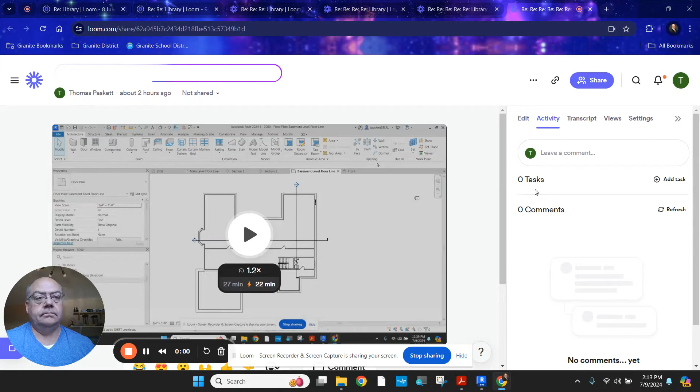Okay, so what we're going to do is there's definitely way too much space here. So in order to make it all work, and not knowing what the sizes are, we're going to do a little mix up here. So what I'm going to do is break the connections here.

So these walls are bound or connected with the walls below. So we're going to try and...

Do a little copy with them. So what I'm going to do is copy them over. I'm going to copy wall 1, Control key, 2, 3, 4, 5 walls. I'm going to take it from this outer endpoint to that endpoint. The reason I did a copy instead of a move is if I do a move, the walls underneath on the main floor are going to move as well.

So now I'm going to go through and delete these walls out, and reveal kind of the new layout, which is now a little more appropriate for a closet here. Might still be a little deep, but it's something we can work with and get that size constraint figured out a little bit better.

Okay, so we have that. The flush up here actually works pretty good, and we'll show you how to do the roof over these in just a little bit. But that now almost gets us lined up exactly where we want to be with a little bit of a change. So we're going to take and just move this one over.

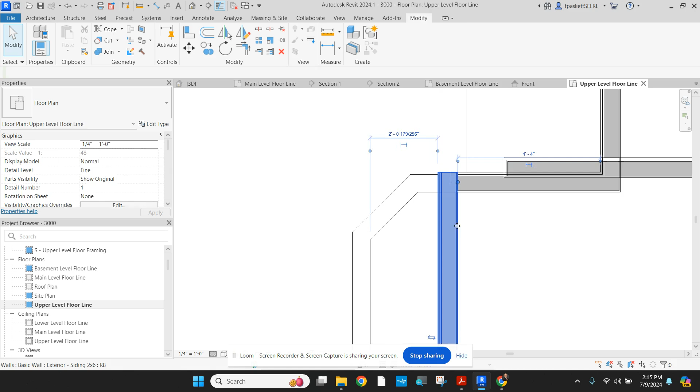Whoops, see, we're moving the one below now. Oh, it's kind of bad. Let me undo a couple of things here. We're going to undo because I don't want to move the wall, I just want to keep it aligned. So I might have to do a couple of things here. Let's take those back out again.

Let's work with our corner tool, and we'll corner these walls up. Hopefully that'll further break that connection. And right now I'm lined up on the top of the brick, so I'm really not in the correct spot for that wall there. So I'm going to try and do just a move.

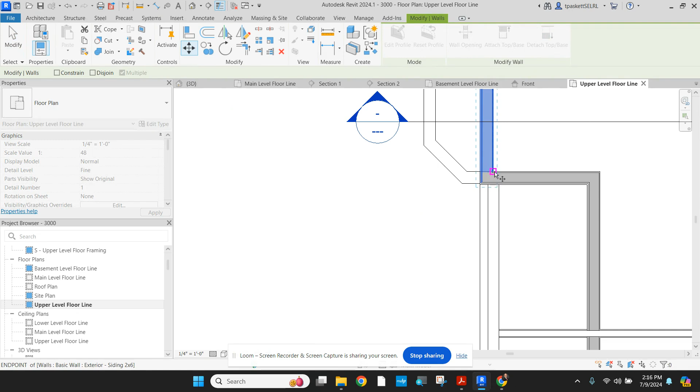Nope, it's not to connect that. So I've got to unconnect those. So what I'm going to do is take this wall and this wall. They're connected, and we're going to adjust them. Oh, they shouldn't be connected. There it is, that 3 foot 8 inch offset. I'm going to take that off.

So now they're down below, except I kind of need to see them. Doesn't get any better than this, does it? So as we're kind of working that through, let me go down and check my underlay again. All these little settings, as you get going on your plan, things will show up in the weirdest ways. So there we go, now it's an underlay, not a wall.

So there are some things I need to do to that lower floor. Let's fix that before we go any further. To do that, go back into your main level floor line. Zoom out so you can see everything. What's happened is on these walls, there's an extra 3 foot 8 inch offset.

So I select this wall here, and I look at my settings. It's the main level floor line up to the main level top plate, and then there's an extra 3 foot 8 inches that has been added there.

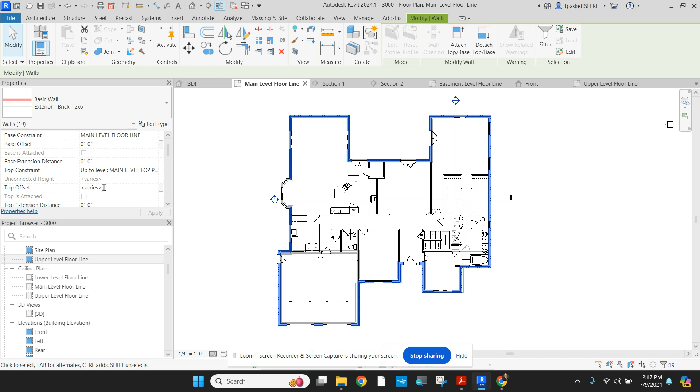So I want that to be fixed for the whole set of walls the same. So then right click, I'm going to select all instances in this view. That takes the perimeter. And now I've got this offset varies because I changed the wall. So we're just going to highlight that and make it 0 and apply.

Now we're going to use the next set of walls. Same thing, all instances in the view, and it should be just those few there. Again, we're going to check for that offset. So base, upper level floor line, constraint - that should be the main level floor line up to the main level top plate. And 1.5 inches, I'm not going to worry that much about that. So we'll do that setting.

Then we have our interior walls, so we're going to do all of those.

Check and see if there's that 3'8" there. It's not on that one. Maybe let's go back and look at our upper level floor plan again. It looks much more like we've got things where they need to be, so we're not connecting to everything, and that's exactly what we want to do. That extra 3'8" was causing some grief, so I think we should be able to get things lined up appropriately now.

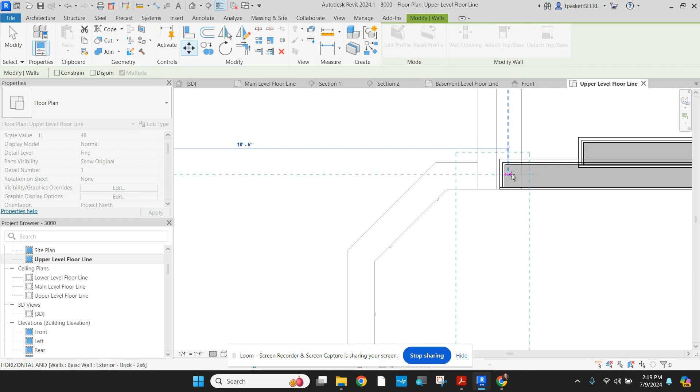Not quite yet, not quite yet. So this is the upper level floor line, still okay on those. Upper level top plate. I'm going to take this wall and copy it, just that one wall, out here off in no man's land. I'm going to delete this one. I could have just deleted it earlier, but I want to move it into the right position without trying to realign everything. So this is going to go right in the intersection there, and now we've got the brick that we can corner.

Okay, so that is much, much better layout. I'm feeling better about this. Still not totally set on the size, but we're going to work that out now, because this size is much more appropriate for a walk-in closet, our little sink area here, and so forth. So I think we're in good shape there.

So let's go ahead and start laying this out. The bathroom is a little different, but that's okay, we can make it work here. You want to be able to see the stairs because we want to reproduce those stairs on the main floor exactly as they are. Right now they go from the basement to the main floor, and we need them to go up to the second floor, so we'll get those in just a moment and see what we can work out.

So here, maybe if we put a floor—no, not ready to do a floor yet. I'm going to take this wall and bring it back. Okay, we're not quite aligned, but I'll adjust this as we build out this portion. I'm going to change this to the upper level top plate, and main level top plate.

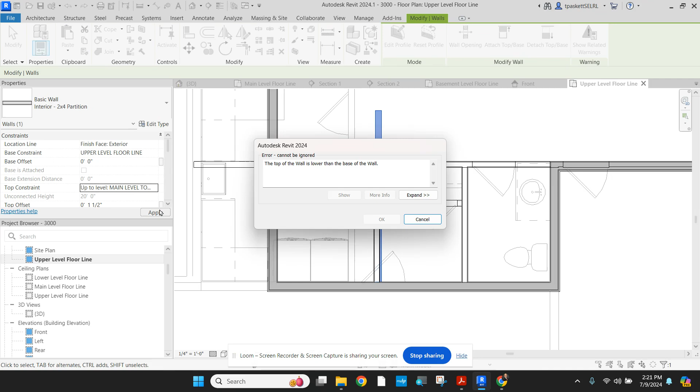Okay, so that wall should not be where it is. It's going to go back down to the main level. A little bit of fixing things is kind of what we're looking at here. So this is main level floor plan, main level top plate, main level floor line. Just making sure everything's where it should be.

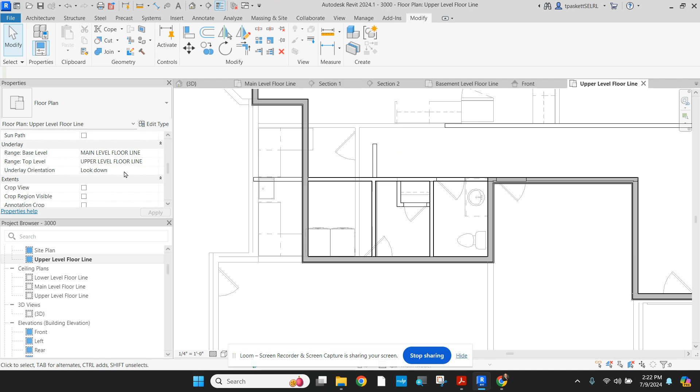And back to upper, and we'll get rid of that underlay here. So that wall is there, and we're going to just say bye to that one. Then check and make sure I didn't destroy it down here. So far so good, I'm not making too many mistakes, just a few. This is main level floor line up to main level top plate, main level floor line up to main level top plate.

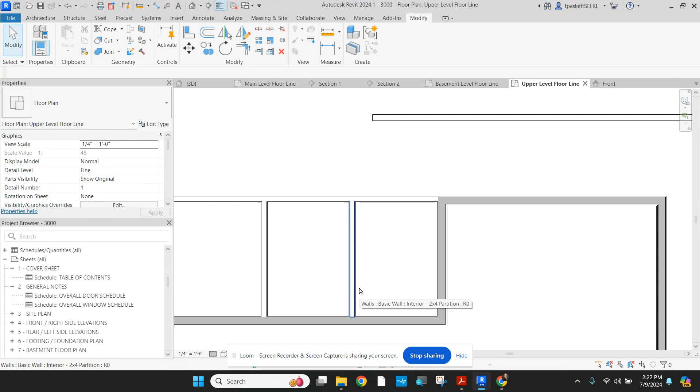Okay, so a little cleanup, nothing too major, but definitely worth doing. All right, now we can start building our space. Now, I have not put a floor in, and when we did the main floor, we put the floor in and then put everything, the components, on top of it. We're going to do that just a little backwards this time, so then put the floor in afterwards.

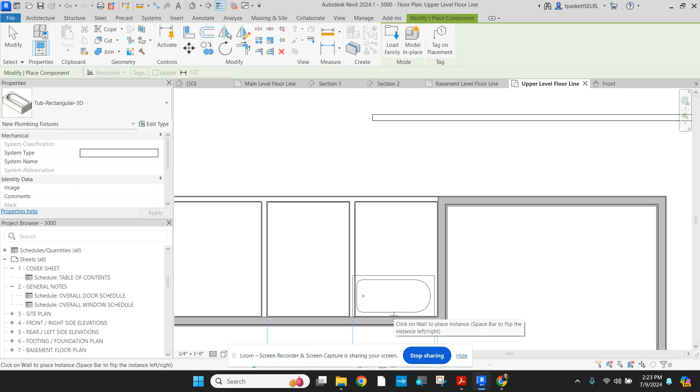So we're going to do a tub, just a standard rectangular 3D tub, and it goes against a wall, so that's why we want to make sure you get it in right now. The little circle there, that's the drain, and we want that on the same side as the water closet's going to be. So we'll pop that in there, use our align tool, get it perfectly squared away and aligned.

So looks good, and now we can put in the water closet. This is just a nice, simple little restroom layout, nothing too complex. So we'll go in here, do our search, and grab our water closet, and rotate that.

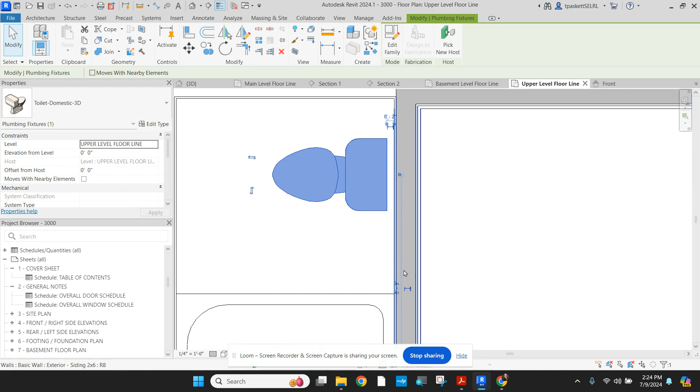And again, we want it off a little bit from the back, about 2 inches, so we'll shift all that once we get it. We'll change that value to 2. And we're going here, let's grab the wall, we're going to move it to the edge of the tub. The same rule applies, so whether it's a cabinet, a wall, or a tub, I want about 18 inches between the two. So it's 1.5 feet—that might be a little close because I've got a long way to reach to the wall. So let's check the other direction, I'm going to move it this way.

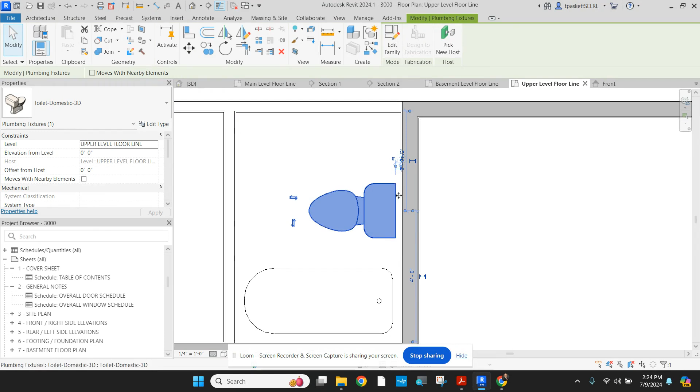And see if we can't. I got 3 feet there. So let's go 1.5 feet there. And that's going to be the layout. So there's a little bit of room here, which is what you want. You do want to be not too far away from the wall. You have your dispensers that would go there and keep things straight.

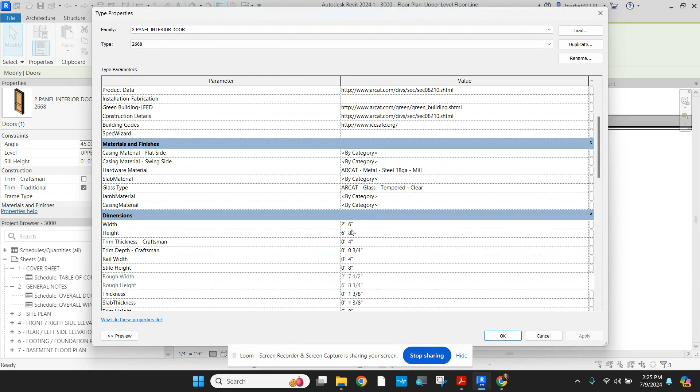Then we're going to put a door. So we're kind of just putting a door in. So 2/6 door, I want 4 inches on the corner. So we got that, and that should swing open just fine with that. And again, I want to check, make sure the size is correct. It needs to match. Make sure it's not more than 30 inches, because that would be a problem. And so we're right where we want to be. So that's good. Otherwise it won't swing past the water closet.

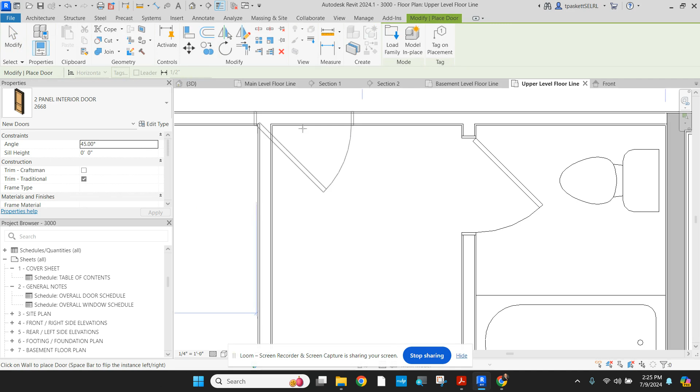Okay, then we have in here, we have another door coming in. So let's go ahead and put that door. And I'm just going to use this 2/6 door because it's pretty handy, and it's doing what it needs to do. So put that there, and we'll adjust. And again, we might have to move the temporary dimension connection, so it's a little more exact as to where we want it.

If we can get it to cooperate. It wants to, it just doesn't want to do it. All right, so 4.5, that'd be correct, because I think it's the rigid board. Oops, go back to where I'm supposed to be.

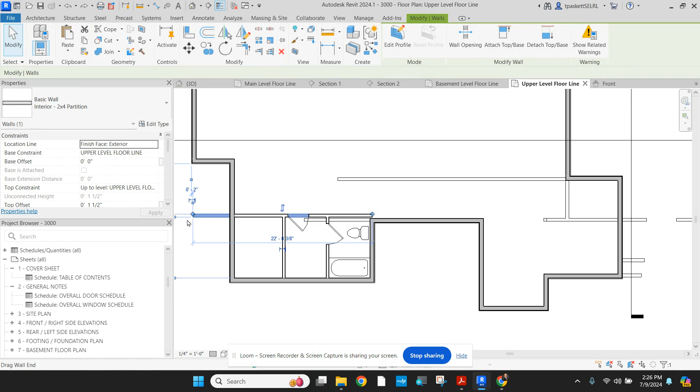And looks like there might be another wall in there. I'll have to take care of that in a minute. Upper level floor. Let's see if we can. Yep, that's another wall. So this is just going to go away. I'm not sure I got all these double walls, but I did, and it wasn't good. This one's not a double wall.

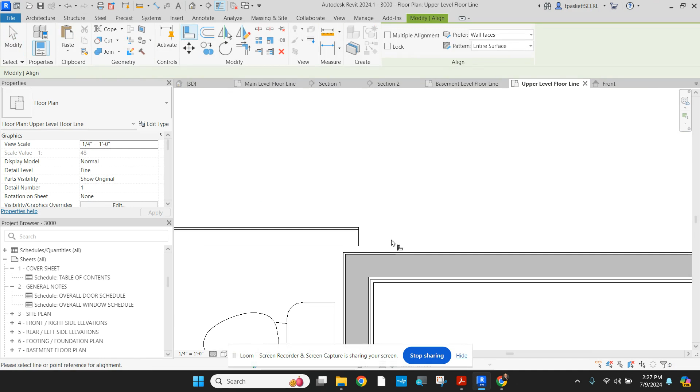Top plate, line this one back up. So what, just so I kind of know, when you're working on these and you're copying and cloning, you do have to make sure you check and make sure you're not making multiple layer copies. That is probably the worst thing you could do on these.

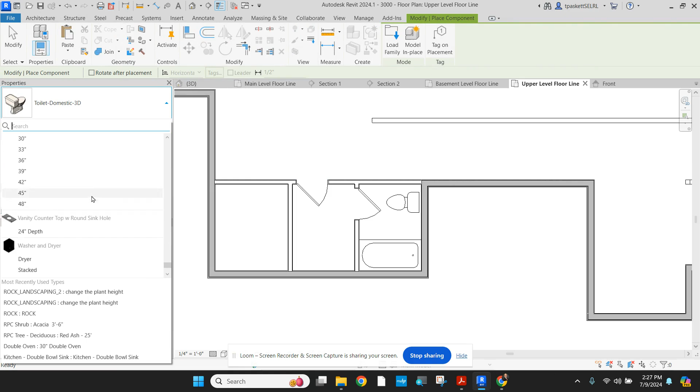All right, we need our sink. So we then go architecture. Now, because we've used it before, these vanity sinks are in here now. So I'm going to grab a 48-inch one, which is a little narrow, but we're going to fix that. We're just going to place it right there. And so we've got about 6 inches on each side.

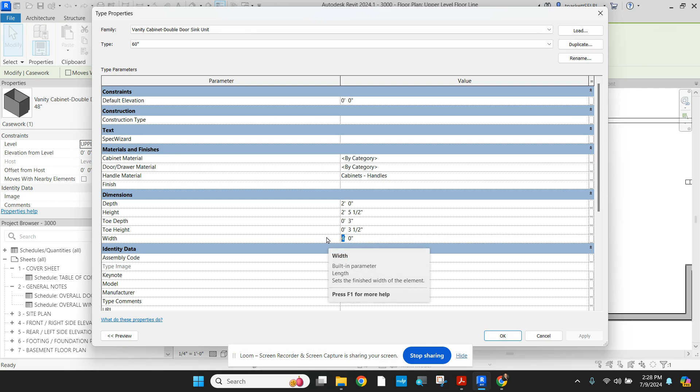So I'm going to modify this. We'll select it, edit, duplicate. I'm going to change out the 2, so we're not going to do a copy anymore. Change the 48 to 60. 60 is a 5 foot. Yeah, 5 foot would be good. We might come back and go 4/6. We'll just see how this looks. Let's do 5. Apply and OK.

And now we'll just push that back. There, modify align. Simple, I'm going to give you just some space. This is probably going to be a teenage room anyway, so lots of things going on there. Let's do the countertop.

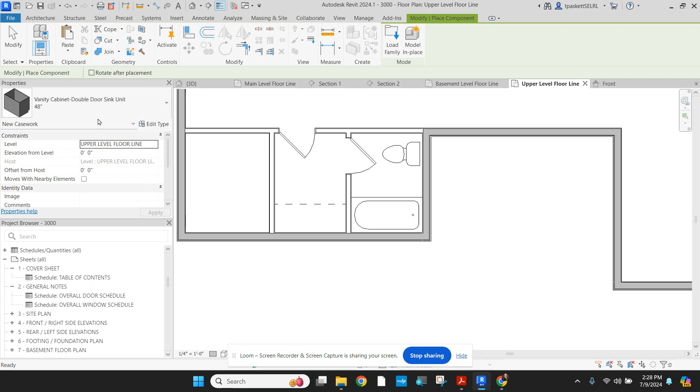And we want this one right here. Spin it around. Place it in the corner. Cancel out of the command. Adjust it, so we're just going to slide it on over.

Now we need a sink. So, I got wrong countertop, this one doesn't have a sink in it. Let's change that. We want this one. Yay! Happy day, got the right sink finally.

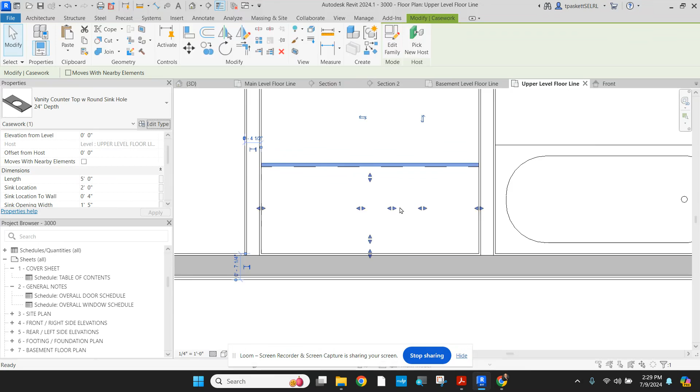And we do some adjusting here on it because it's down low. So the length's 5, we'll just stretch this out so it matches. We'll take the circle. And let me look real quick what the height of this is. 2'7". That should be right. Take the middle point here and put it in the center.

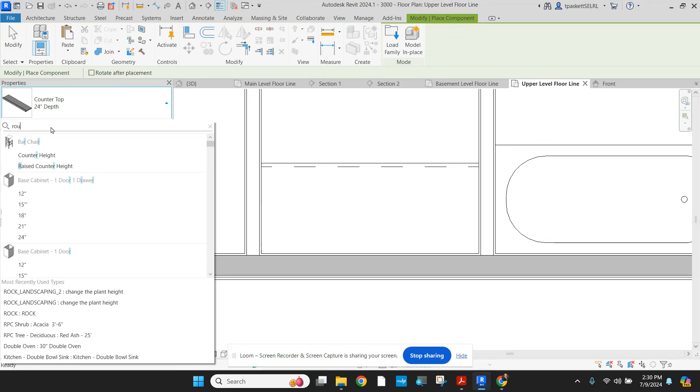And then we're going to do our components, and we want round sink. Spin that around with the space bar, and place that right there. So that's coming together, it's starting to look a little bit more like it should be. And then we're going to do that same door again, and put it right here in the middle. So we have that. Then we're going to add our closets.

So we have those. So like I said, once you get things loaded, you can really get a lot of things done quite quickly because it's already in your file. And there it is, the closet shelf.

And it's not letting me place that because I do not have a floor yet, so I'm going to have to wait on that. I have to have a floor because it's based off the floor. So, and that's okay, it's going from the floor up, and we just have to be aware of that.

All right, so that lays out the bath basically, except that's closet. Now we can worry about getting this room system right. So come back over here.

Let's go to the main floor and put in that stair. That means that stair is going to go up, and so it goes above this one. That's going to be exactly this same stair here. So I'm going to copy it actually, which is kind of crazy to think about what I'm about to do.

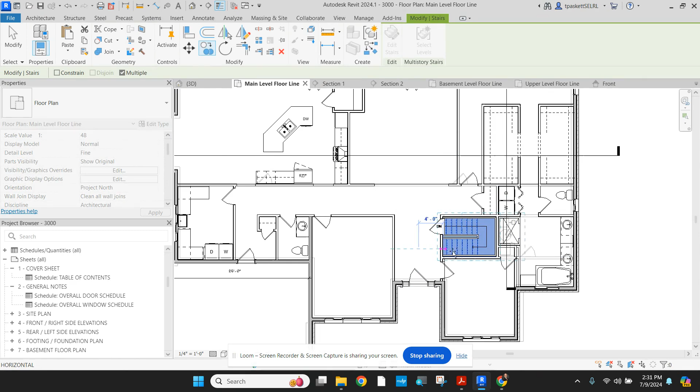And we're just going to slide it over to the side. And that's our up, so we're going to flip that. So now, let's see if we can get that to work out the way we want it to.

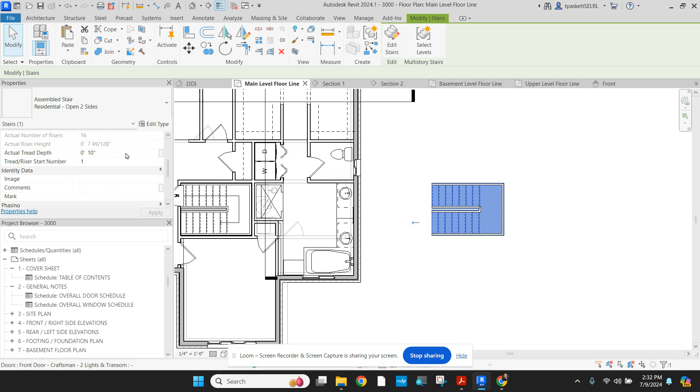Let's see what happens there. We've got to get on the right level. So this will be on the main level floor line is where it's at. And it should be going the right direction. It's feeling a little, this is going down, this is going up.

Let's do a 3D look and see where we're at with this. See if we can, nope, it is backwards. Okay, so that's going there.

And this one should be coming up. I think I did it backward. Yeah, this comes up this way. And so this needs to flip.

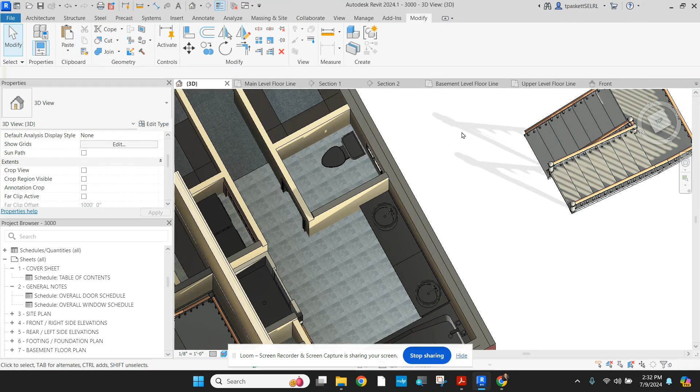Okay, back to our main floor. And we'll flip it again. Hopefully everything's set right. I'm going to take and hide our underlay so I don't get anything mixed up there.

Okay, that's correct. Don't know. Well, it goes all the way up. So, okay, and then this is main level 2.

I am going to have to recreate this. What's happening is it's not taking it to its correct levels. It's just kind of sitting there. So let's just create a new one real quick.

Architecture stair. We then go up on this side. So this is going down. This is going to go up. So again, we're going to do main level up to upper level.

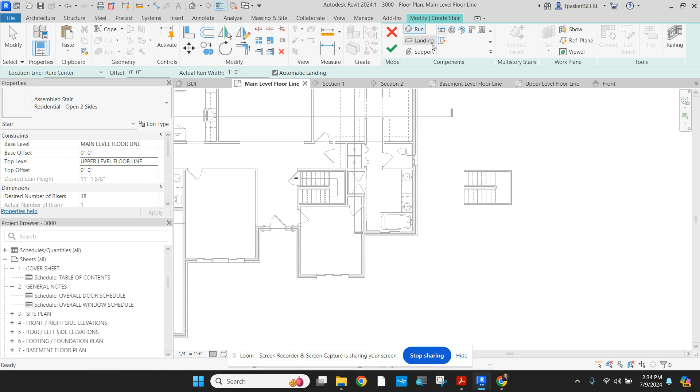Should be, it's a little bit higher, but that's okay. It's no worry. Stair, 7, there's our 18. Okay, so we're going to start here. We're going to go 9.

Come up here and come back. Oh, that didn't work good. Got click happy. Bring that all the way back. There we go. Do a little adjustments from the modify. Move that down.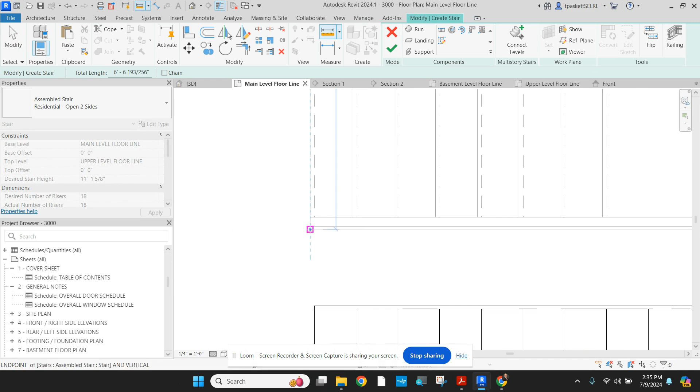And this is where it gets tricky. It needs to match this exactly. So if it doesn't, we have to make sure it does. There's no way to not. And that is, of course it is, 6 foot.

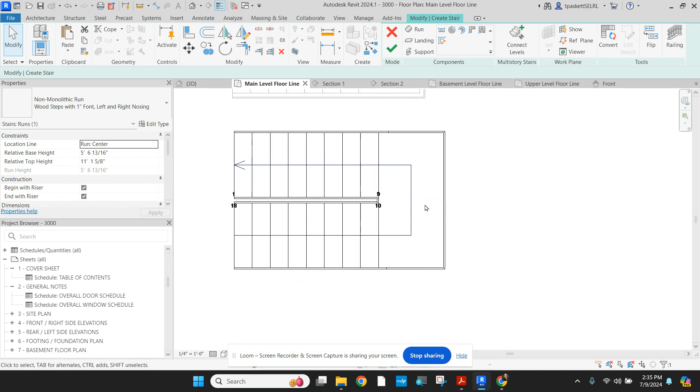Okay. So we're going to select here. Let me just check that off. We're going to go and make sure we match exactly what that is.

So back down to the basement, and we come down to the stair, and we're going to look at the width. Hopefully I can find the width and just adjust it. That would be so much easier than what it's wanting me to do.

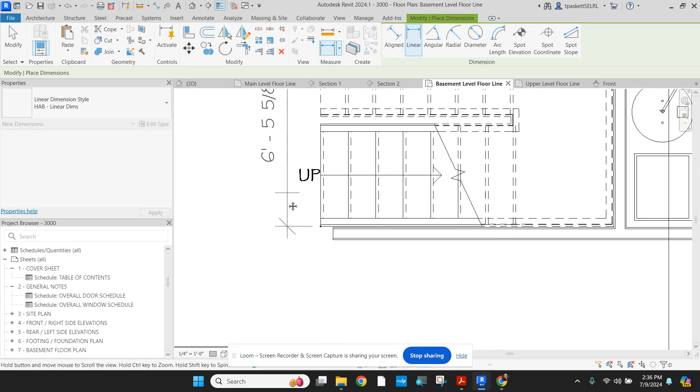And so what it's wanting me to do is manually set that stair. And I'm just not really wanting to do that, but it's what we're going to do. So I'm going to throw a dimension on here from that corner to that corner. It's just a little easier to control when you have a set value. And so it's not crazy in there.

We select, there's a quarter there, and we want these to be the same. That's the goal. And it's not looking so great here.

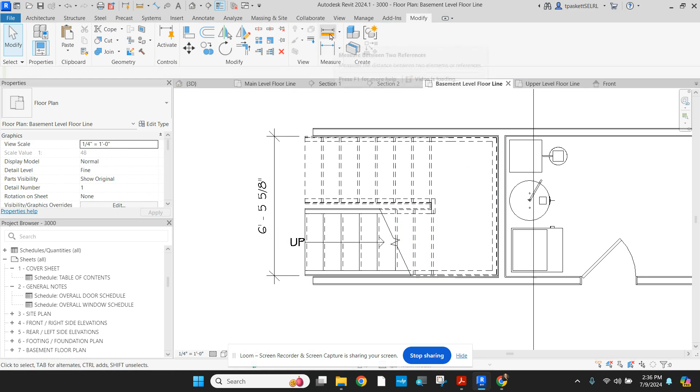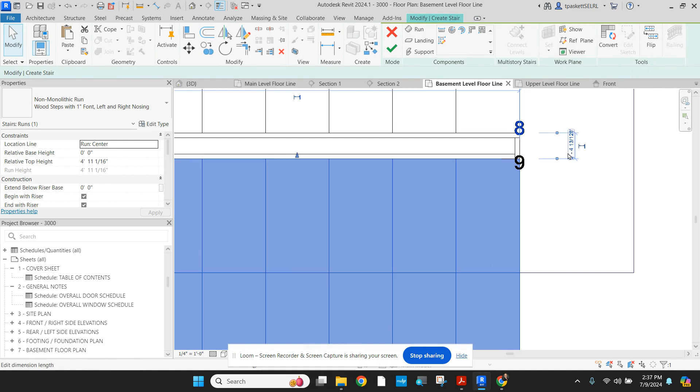So let's see if we can get in there and edit that out. Fix it, Felix, get that down right. And we'll edit. And right here, we're just going to make that 4. So it's exact.

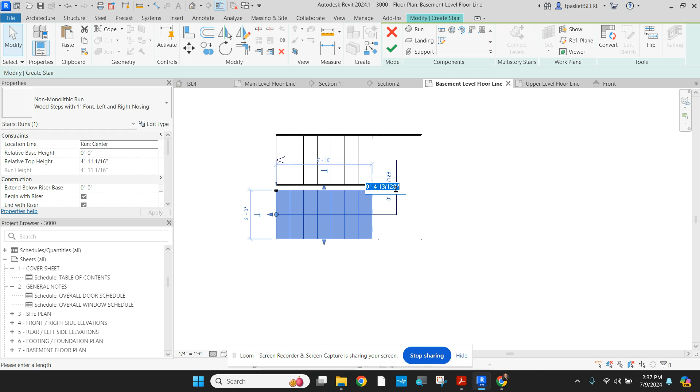Okay, now we're going to come fix this stair, so it matches with an edit. And get our numbers come into play. And make this 4, so they're exact. All right. Yay, let's go back to our main level.

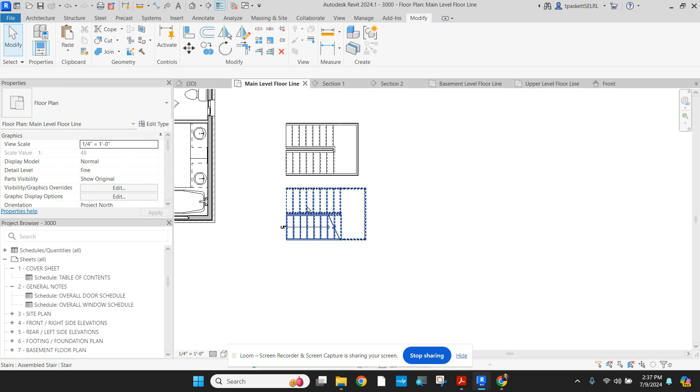And I think I changed the wrong one. So much fun. Yep, that was the basement one I fixed. Okay, that one's gone, this one's getting changed.

I'll edit the stairs. Make sure this is 4, so it matches what we've done. And that makes 3 and 3. So check that off.

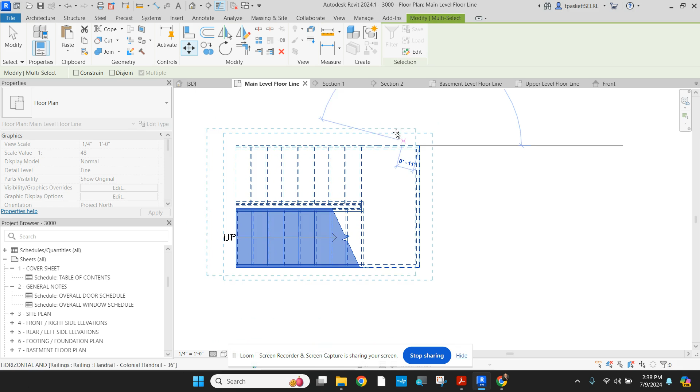We then do a move. This is going to go up this way, so that's going to be correct. Finish, got that endpoint. And we're going to come over and place it right in there. So it's the same in theory.

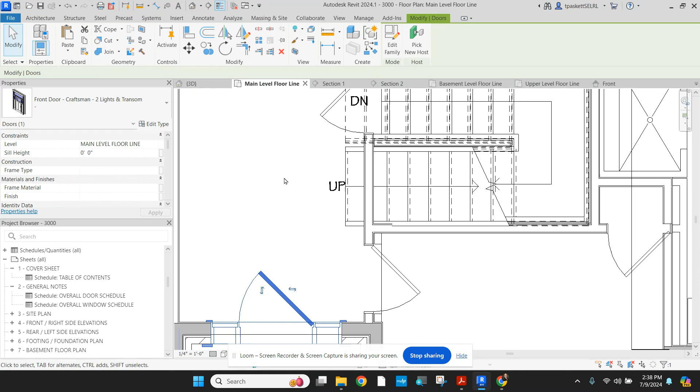Now it's not quite the same because we didn't adjust the stair handrails. That's always a problem. And we've got to do something about that wall now on the main floor, because it's just the way it is.

Yeah, so what we're going to do is we're going to get rid of that whole wall. We're going to have to do that. We're going to fix things as we go. So, yes.

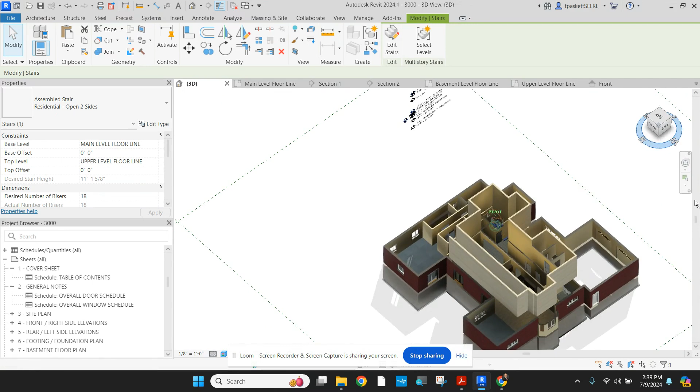Okay, so when we select the stair, we have this railing. Let's go 3D so we can see what we're working on here. Remember how I moved the railings over so they were a little bit more centered on the part? That's what we've got to do. We've got to get the stair to be exactly the same. And finding the angle is tricky.

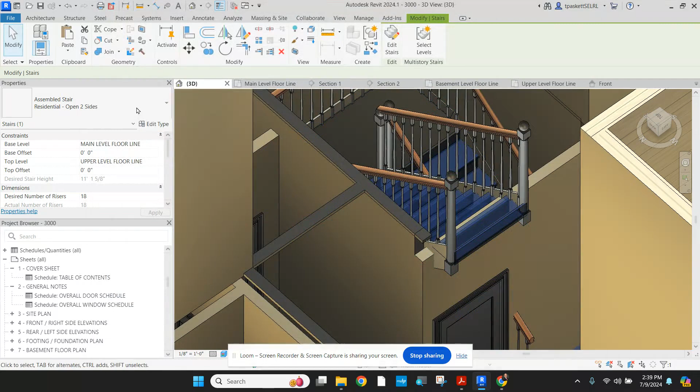All right, so we're going to take this stair here, and we're going to look at our edit type, and we've got closed and closed, so that's how we set it. And we're going to say okay there, and then we're going to select the railing here.

I'm going to change the 1 to a 2. Apply that. The other railing, if I can grab it, from a 1 to a 2. And so now they should match exactly.

So there's some things you have to just make sure you're checking on. Now, because of what's happening on these stairs, when I go back down this main floor, remember I said these doors, it's an unknown, and this door is kind of in the road. So what that means we're going to do is this.

We are going to remove, then cut this wall here so it's not there. And we just use a slice, cut the wall right there. And when I take this wall out, I'm going to lose that door.

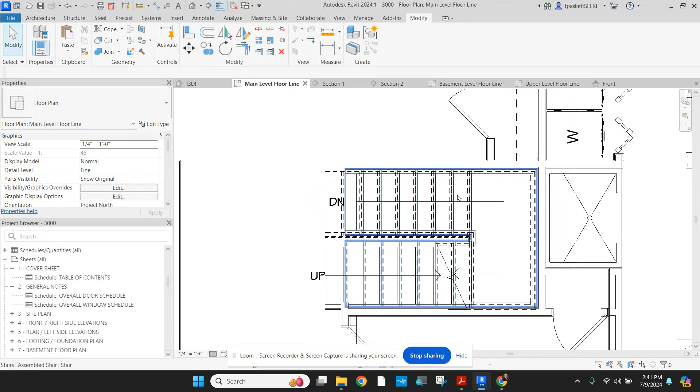And I'm just going to go ahead and do it. So it's going to be delete. The door is gone. The stairs are coming up a little bit more in where they're at. This wall is going to come back, so I'm going to realign it.

And go with here and here. Oh my goodness, it did not realign. Gotta make sure it does the right thing. So we got align...

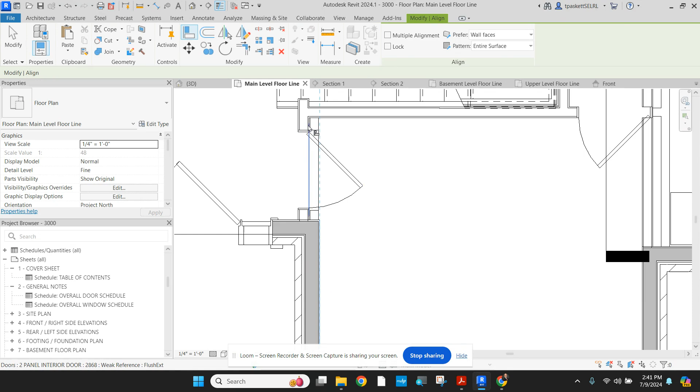And get the door. So let me do it. Why? And all right, here we go. Here goes everything, folks. Where's that? There it is.

So we can get that to align now. There we go, so I'm lining that up. Now, when I go into 3D, we have this stair coming up, and so the baluster is there. There's your step, and you're on.

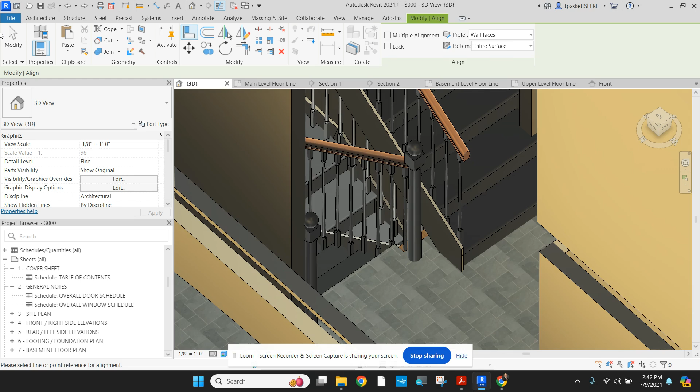I need to fix the floor now because the wall is gone. So let's see if we can get, oops, don't delete the floor. That's silly. So I'm going to try and get that selected. And then go back to the main level, then I edit that boundary.

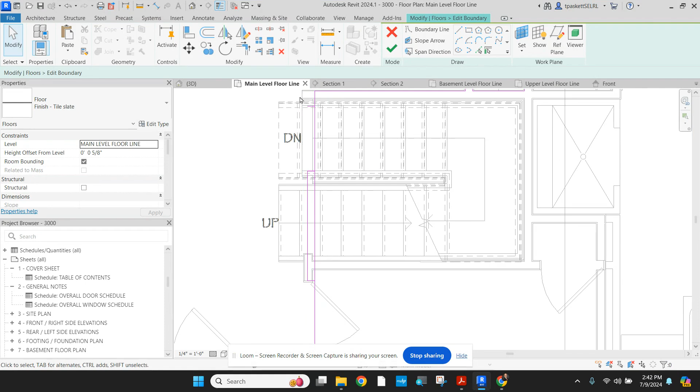Interesting. We're going to do a corner tool from way up here to way down here. And then we're going to delete these little pieces out. Make sure you don't have the other one selected when you do this. You want to be very aware of what changes you've made and how you're doing them. So it's a little dicey here at this point.

And we should be able to find out why. Let's see. Oh, we got another one here. Okay, so that's my corner, here to here, and take these lines out. And see if that does it. Nope, still something not quite right with that line.

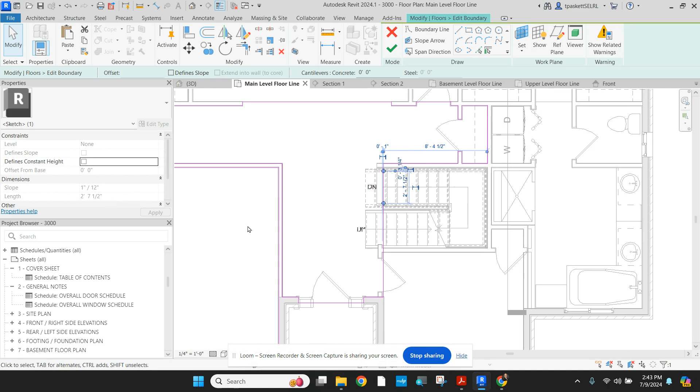And this is where it gets kind of nerve-wracking. There might be another one. There it is. So there's another piece of line right there underneath it. So I have to take that out. There we go. So now there's our new floor.

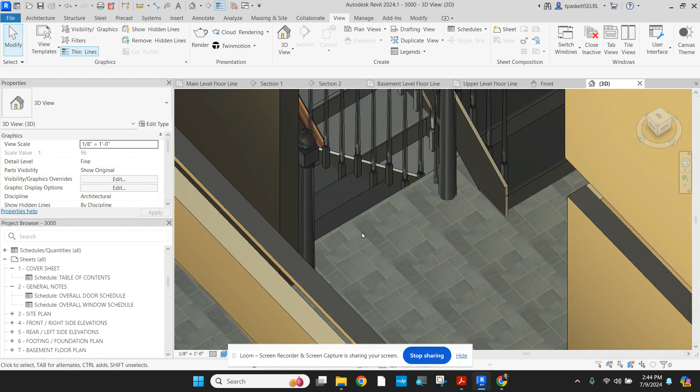Back to 3D. I just closed 3D. Go back to the 3D view. Take a look at it. Make sure it's kind of doing what we want it to do. So we've got the floor there, stairs come up. Yep. Now by doing that, that means in the basement I have to put a door at the bottom here. Not a big deal. It's actually easier to do it this way than another.

So then do architecture, modify, and then do a copy of this wall, and I'm going to just finish that out and drag that to the front, nice and straight if possible. And I'm going to put 3 feet between there and the end of the stair. So this goes to 3. Now we corner the walls.

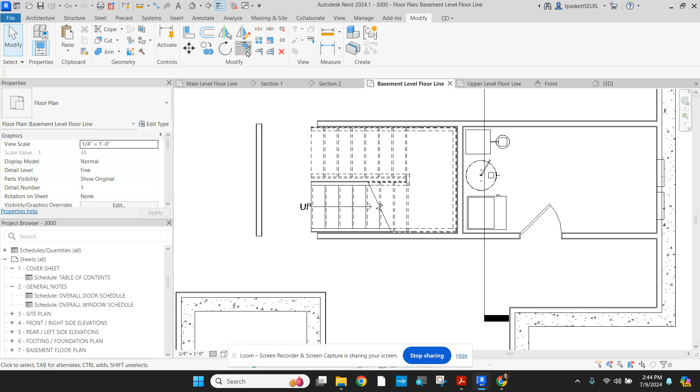So this just makes a little landing in here of where to go, so you can come down, get off the stair, go to the door, add our door here. And technically we could go this way because there's room there, so let's do that. So we open the door, go up the stairs, and we have it closed. So now it's a closed off area, meets code, and we're good.

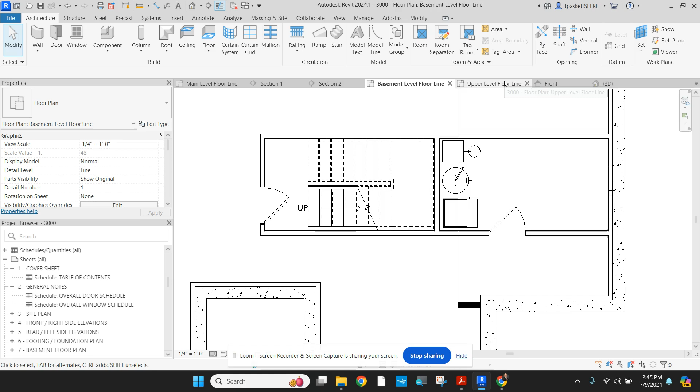Lots of things. So once you think you get a floor done, then you get to the last floor, and all of a sudden, nope, you got to go fix everything. So we should be getting there.

Let's go look at our sections. I'm going to slide the section down. So section 1 again, go look at that. Back it up. And this is what's critical: make sure the stairs are not on top of themselves. So this is what you want to see, so as you're going down this one, your headroom is maintained and you're not bunking your head on every step. So it's kind of important. So that's a good thing.

So now we can go back to the upper level. And we have our room here, which we decided is a little furnace room. And that lines up, so I'm going to check and make sure that's still lining up. And we have a wall there, which I'm okay with, and our framing here. So we do have to fix this because this is going to be open to below. Can't do that until we do the flooring.

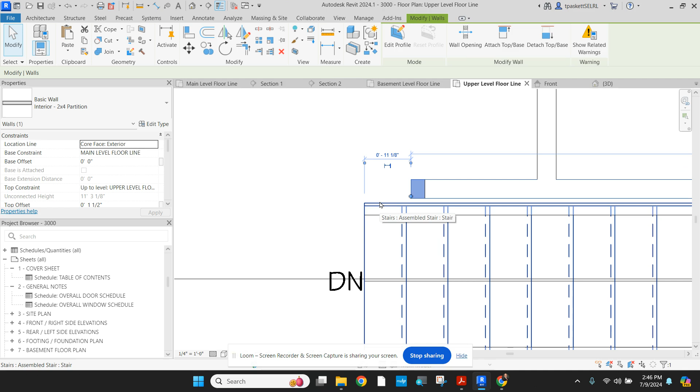So that's just fine, because it's going—and I'm actually going to take this wall and pull it back just a little bit because there's another wall right here that I need to adjust. And then this wall's going to come all the way out to the edge of the stair. Now, the easy way to do that really is the align. Just take the edge of the stair, let it finish doing what it's doing, and just bring the wall to it. Okay, so that just kind of cleans things up a little bit. This side where it's open, this is down below, so you're going to see that coming up, so I'm not too worried about that.

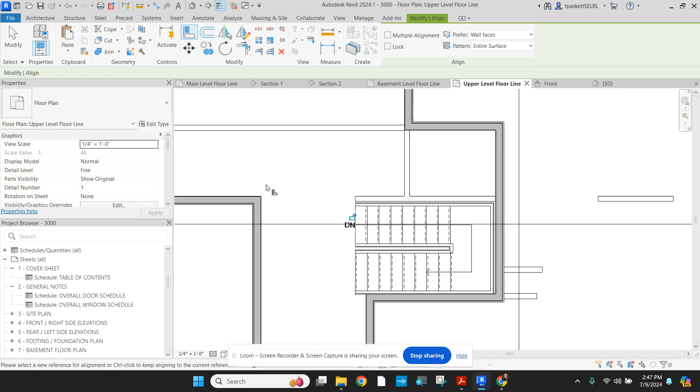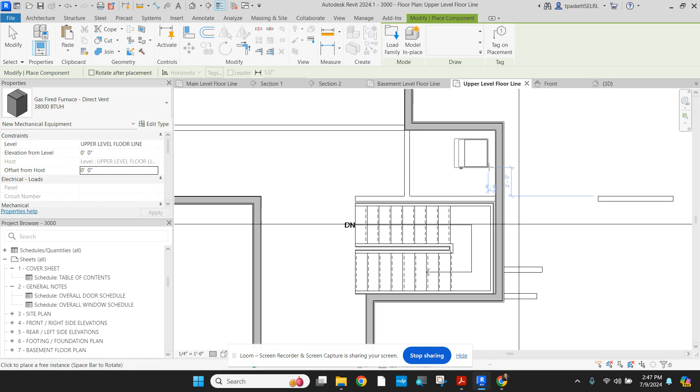Let's do our furnace. So architecture, component, and we'll do furnace, FUR. And we'll bring a furnace in there. And I'm just going to bring—now notice these are different BTUs, how much energy they use. Just bring the lower one in, the smaller one, because it doesn't have to be huge. It's just in the bedroom, the space up here, so it doesn't have to be a really large furnace. We'll just pop that in there. Okay, so then we have a furnace in that room.

Means we need a door. And we'll do that, and I'm going to slide it. I'm going to place it and then I'm going to adjust it, because centering doors is not always your best thing—it ends up taking a lot of square footage out of your floor space. And if you can shove things over and they still work, then that's good. And so now you've got all this room when you open the door to work with. So kind of work that way.

I'm going to put another electrical panel up here just because I can, and in case they want to add in like a whole bunch of crazy electronics into the house at some point, you do want to have that ability. And I gotta remember what that was called. Let me go back to the basement and bring up which part that was. Single phase. Okay, back up here, component.

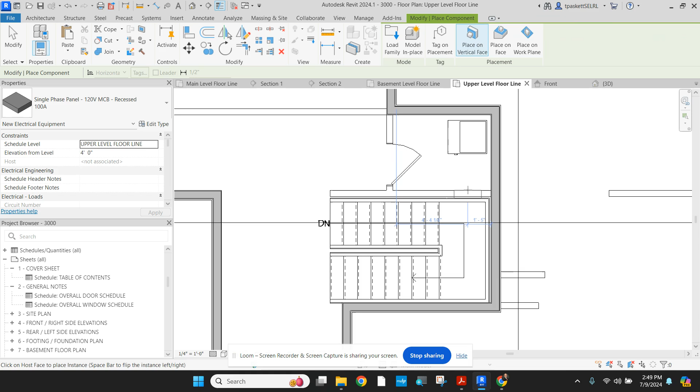And I really try and make sure that I'm labeling things very delicately so they are easy to understand. So we'll put that there. Take that one out, just so it fits in the wall a little better. Now I can do that because there's no water in that room, and that fixes that problem.

All right, so now we're here. This is a bedroom, so we should have—well, we got 11'7", and that's fine. I can live with that.

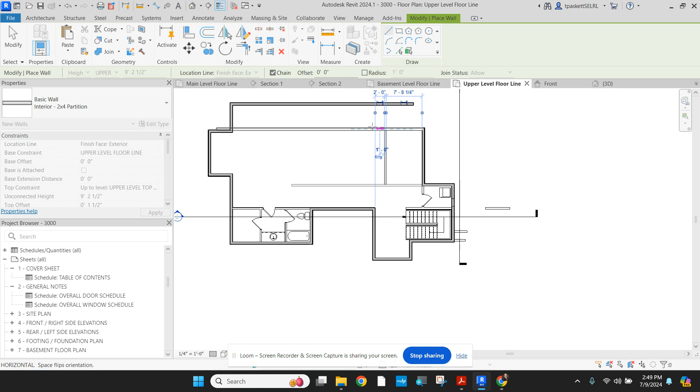I'm going to do a wall. It's a partition wall, I'm just going to throw one in, then adjust it so we modify it. This is going to be 15 feet on that inside clear, and that's where that room's going. I can live with that. Just making sure everything's lining up right.

And realizing that I am not setting my walls the right height, so let's go fix those. These are upper level floor line going to upper level top plate, so we can see the detailing on them.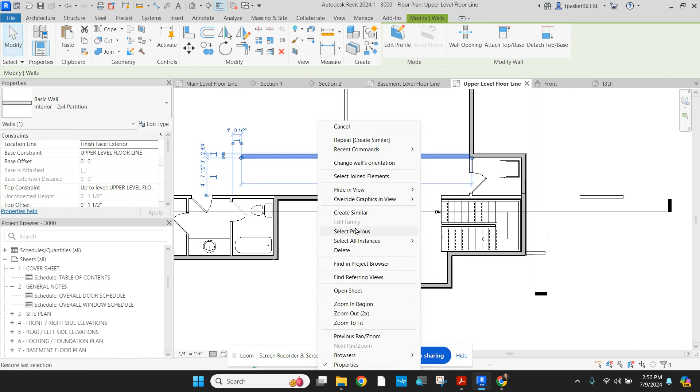It's not quite doing what I want to do all the time, so I have to kind of fight all those. Base is going to be upper level floor line, top constraint is going to be upper level. Oh man, it's not going to work on this.

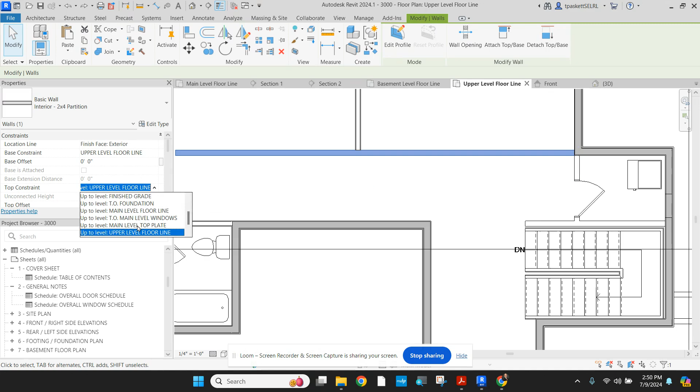I've got too many walls. Let's cancel that out. I had to do them one at a time because there's too many walls overlapping still, and that's kind of my bad because I did not go through and clean it up right the first time, so now I have to pay for that. But if you can't see the detail, the other way you can do that is just your match properties.

Select and incorporate that into the walls we have, so you should see the drywall on both sides. It's going to help keep things where they're supposed to be.

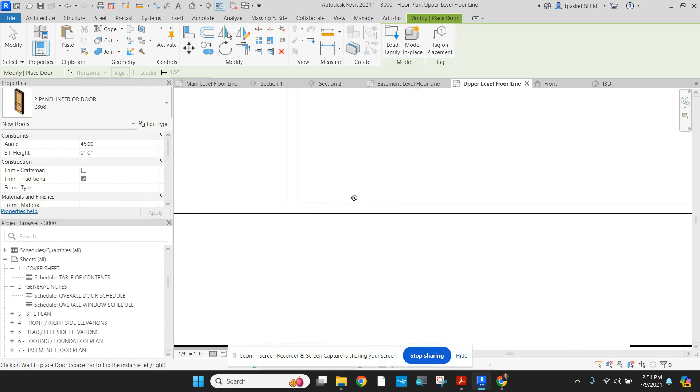And this bedroom gets a door. Now on this door, I'm going to go a little larger. Again, if you've ever tried to move a mattress around a corner and fold that mattress, they do not like that. So I usually try and do a little bit wider door just to make things a little easier. And if you've ever racked your knuckles moving furniture in a room, you know exactly what we're in for. So making things a little more accommodating.

That's really why you take these classes, is so you are the expert and you can give feedback that makes the world better for those that are using your stuff.

All right, now we can put in this other bath. And this bedroom's kind of a uniquely large master with this window seat, so that'll be kind of good. We're just kind of going to plug along here until we get it all in right.

And make sure things are lined up the way they should, which means I'm probably going to pull this wall down since it's—just because I can. So, all right, so we've got an 11 by 5.

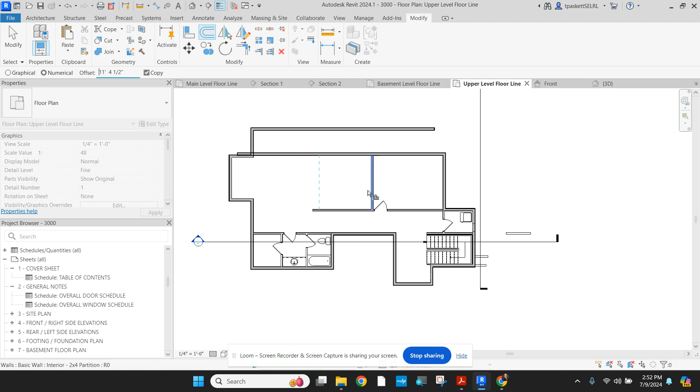Bathroom here, so let's do an offset. Let's modify offset 11 foot 4.5 inches—we want the thickness of the wall added to that. So let's put that wall over there. Now that means that when I select the wall, the distance between the two is exactly 11 feet, so that makes it easy.

And it is really kind of a reproduction of this space down below in here, which does kind of help with things a little bit.

So we're then doing another copy. I'm just going to throw one in there and then align it. And just like that, we're starting to form our spaces.

And then we can start placing. So again, you can just copy away. It's a little harder to do with this one, so just place it.

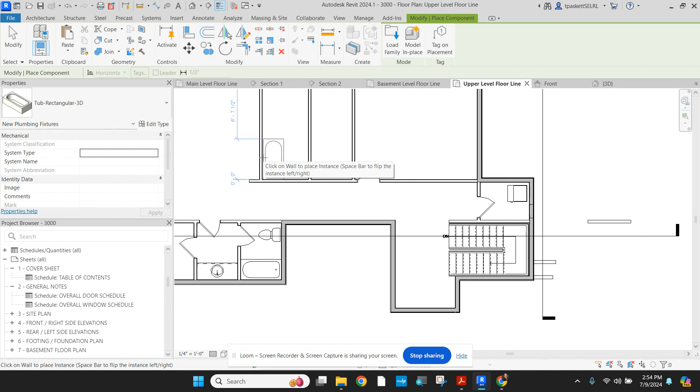And so it works. It may seem like an extra little step, and this is going a little slower because I'm walking you through each item. But you're learning, growing, becoming a better person by the minute. So pop that there, and that should be in there just right.

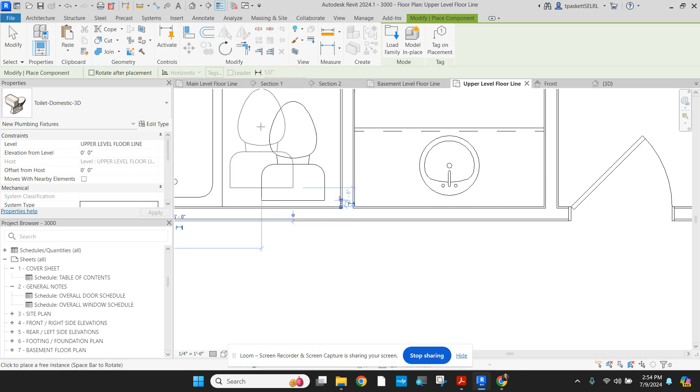Then we'll do another component: our good friend, the toilet. In case you ever buy perfume or cologne and see eau de toilette, toilette is a French word. It means toilet water, which is wonderful when you start thinking about it.

So 2 inches there, and put that to there. I want that to be 1.5 feet, and check the other side. Okay, we're good. Again, this side is the one I want to be more exact, a little closer to the wall than the tub. Give yourself some space. Cool.

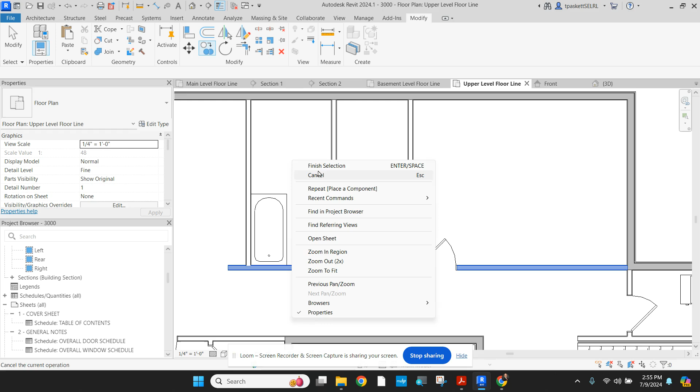We're making progress very quickly now, my friends. Just need to copy another wall. We're going to copy the wall at the back of the bathroom there, and go from there to the opposite side of the tub. That's going to create this bathroom area.

But now I've overlapped that wall, so let's slice it right there, and then delete this part out, because I don't want to go into the bedroom with it. So we'll slide that over, and this is a slide over as well. Kind of nice that it self-heals and puts everything where we want it.

And we need doors to get in. So here come the doors. We're going to put this... oh, this is a bit of a tight one. That is a very tight door. I'm not happy about that.

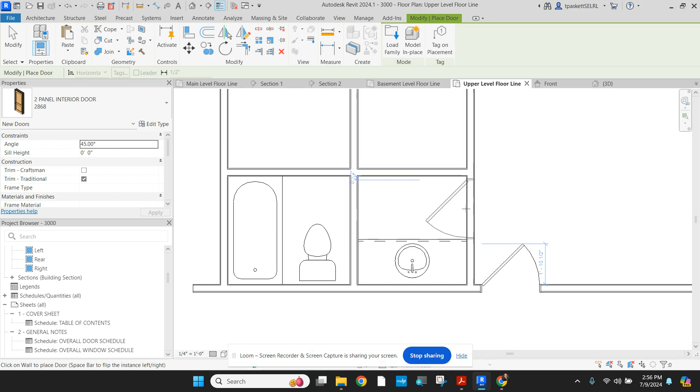2/6 doors are usually the smallest I ever want to go, so I'm going to have to contemplate the meaning of things. Oh, that's a 2/8, that's why. Silly teacher—2/6. Oh, that looks so much better. It's still very tight.

So I'll put those in for now. Yeah, I need a little bit more space, but we'll figure that out. All right, so we get the doors in. Now we can do this.

Let me see if I got a smaller door. Oh, down to 2, you can put a 2/4 door in there. It's not my favorite—I do prefer 30-inch doors. The other option would be to move the wall and put a little jog in there, which is something I might do. So we'll come back and let me think on that for a minute as we get going.

And we have another door—so many doors, so many doors. Architecture door goes here, we'll flip that for flow. Hello, flow. And got to put that—there's a flue supposed to be in there.

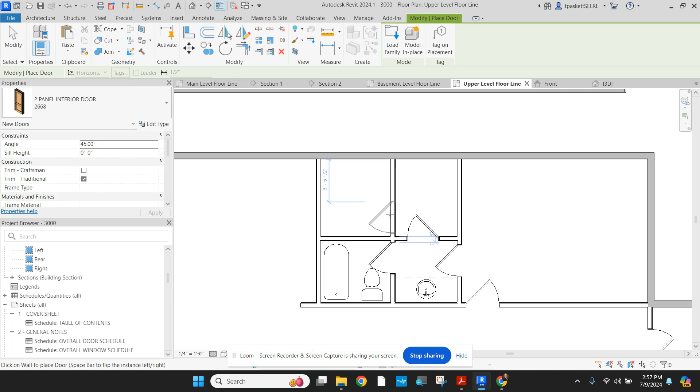This is the closet, and that means this wall's got to be cut. So I'll do a quick little cut here, then I can move this wall over. Oh my goodness, it did not cut right—got to break the gap.

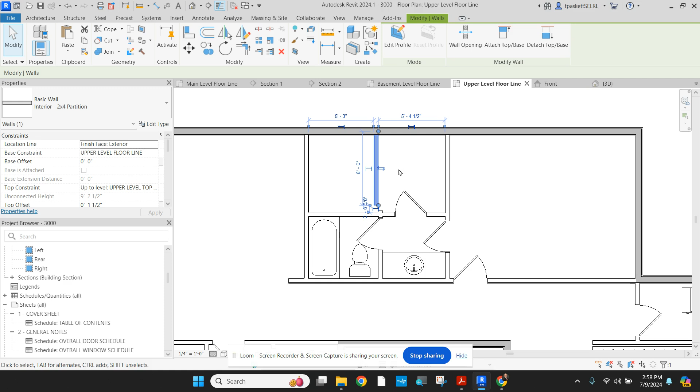This is when you use the gap. Should have, would have, could have. I'm going to do 2 feet there, and then this door can slide over. Sort of.

That's where you figure out the meaning of the world in general. So I got to work these doors out, and I really do not want to go down smaller, but I might have to. And then the closet will be laid out here.

And this becomes our wall. So here's what we're going to do: we're going to pull this wall out—this wall's gone. So if you copied along, sorry. And in the corner, it's a little different from your plan now. That together—so this is the space we're using.

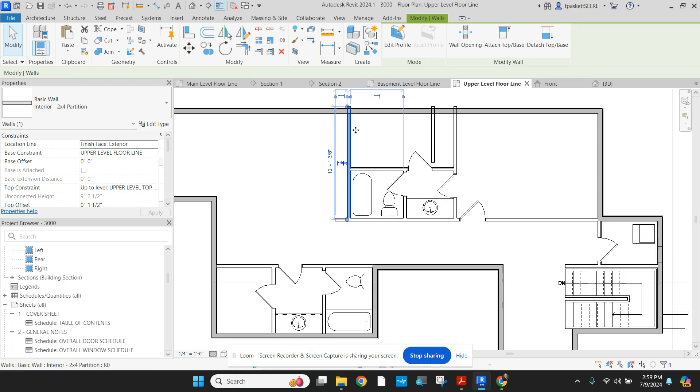And now I'm just going to modify walls and make them clean up themselves until I figure out doors. That's the next thing I want to do—give it some thought, think about it for a minute. Let's get you to that point. It's kind of a long video.

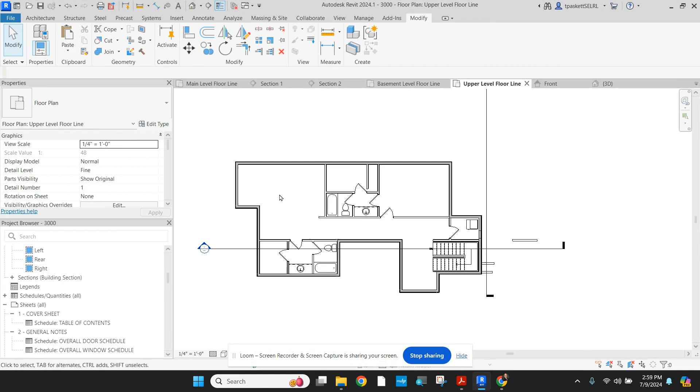And then we'll figure out the solution to that other bedroom. It's got a nice window seat there—works good, might be a little tricky on the roof line. So we'll work that out. All right, go ahead and get that much done, and we'll see you in the next video.